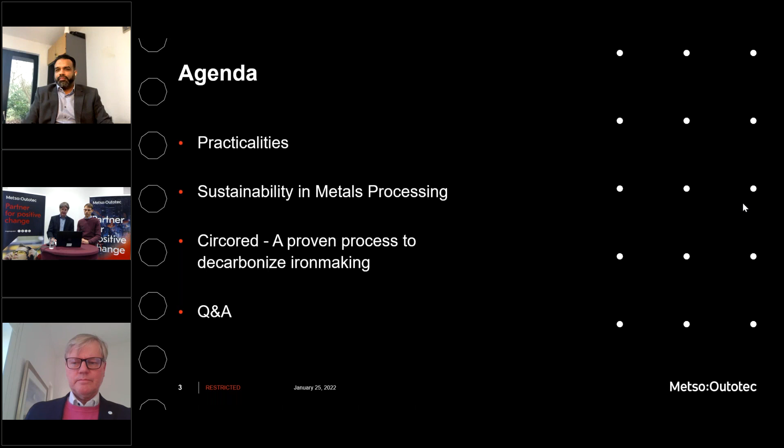Our agenda for the coming hour is as follows. After some practicalities, we will shortly introduce the strong focus on sustainability in Metso Outotec's metals processing technologies. The main part of this webinar will be the presentation about Circored as a process for ironmaking, which has already proven its functionality. After the presentation, we will have a Q&A session to discuss your questions and comments.

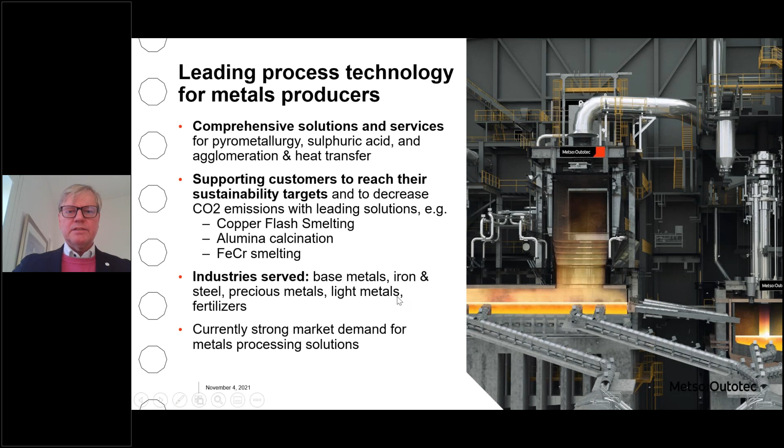The industries we serve are base metals, iron and steel, precious metals, light metals, and fertilizer. And currently, as I guess all of you are aware, there is a strong market demand for metals processing solutions, which we've also been able to show in our order intake during the last quarters, what we have been presenting.

Go to the next page. If we go more into what references we have available, in iron ore agglomeration, we have over 400 sinter plants and 140 pellet plants in traveling grate and grate kiln technology supplied, including the world's biggest ones. So if you really have need for a big pellet plant, the biggest in the world, come to us. Light metals, we have over 70 alumina calcination and tube digestion plants delivered. And then also in smelting, we are the industry leader.

We operate the world's largest copper, nickel, and ferrochrome operations, and we are also widely used in various secondary smelters. Over 60% of global pyrometallurgical copper and nickel are produced with our technologies, and around 60% of global ferrochrome is produced with this technology that we have available. We have also delivered 100 anode casting shops.

If we go into the right-hand side of the presentation, acid plants: we've delivered over 650 acid plants to date, with high efficiency gas cleaning solutions. We have the largest metallurgical acid plant delivered to date, 4,500 tons per day, and also the largest sulfur burning plant to date, 5,000 tons per day.

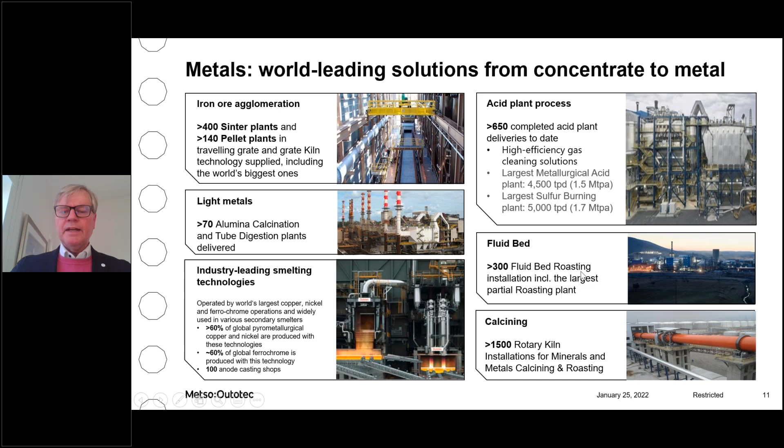And on the fluid bed side, we've delivered over 300 fluid bed roasting installations, again including the largest partial roasting plant in the world. And in calcining, we've delivered over 1,500 plants over time.

If we then look at major metals processing orders we've published since the merger: we've gotten an order for a zinc plant expansion of 150 million euros in Norway quite lately. We've also gotten a 90 million order for a nickel smelter modernization in Russia. And obviously the biggest order ever for the company, a 360 million euro order for a copper smelter to Freeport Manyar in Indonesia, and 6 iron ore pelletizing plants as well as 2 alumina processing plants.

To specifically see where they are situated, we talk about China and India, which I consider the 2 most competitive areas in the world to deliver plants, and that we've been able to achieve orders in this area means we are also very competitive. We don't only have the leading technology, but we can deliver it in a competitive way.

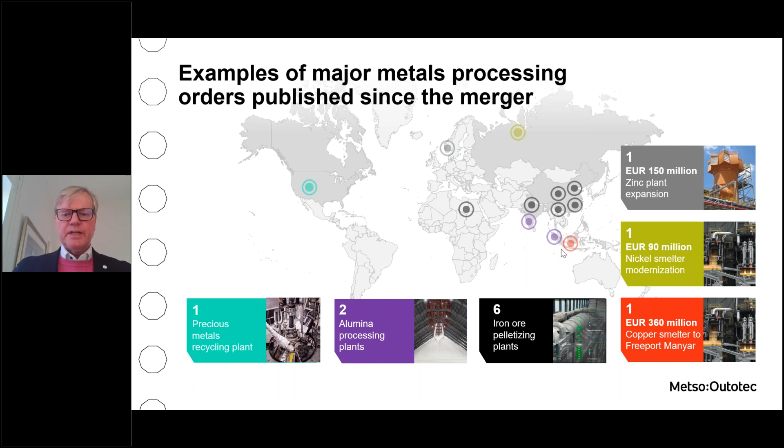On top of that, we have the precious metals recycling plant, which really shows we are also delivering state-of-the-art in the newest solutions, which is recycling plants.

If we look at technology development, we see today that global megatrends drive development: electrification, sustainability, digital transformation. Some of the things we also have to consider are delivering it in a modular design with digitalization, and as said earlier, product competitiveness and service, which is the basis for this leading edge offering we have today.

And then having differentiation through strong intellectual property and process development, because to really be a leader - if we look at our development, we have kind of 4 things that stand out. Either we have the highest yield, use the least water, use the least energy, use the least emission, or we have all 4 of these in the same product or process we are offering.

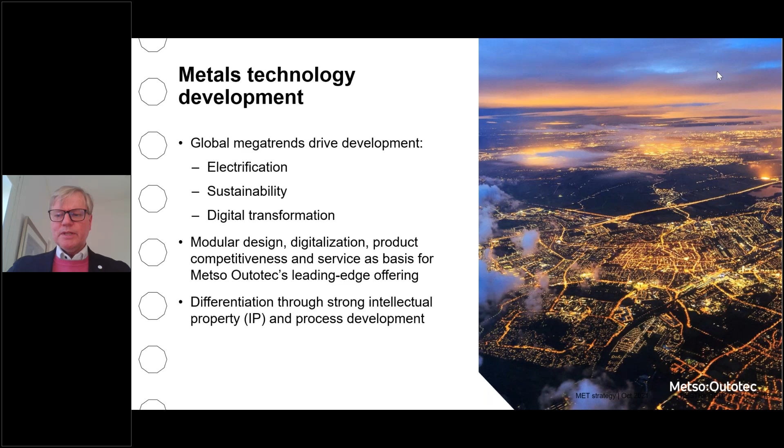If we look at the development we have going, carbon-free production is very high on the agenda at the moment, and that's something you notice in the news. If we look at carbon-free steel, you'll hear more about that going forward, but also carbon-free base and light metals, next generation pellet plants, as well as gas cleaning solutions - just to name a few of the areas where we are spending money to develop products for your use going forward.

As you can see here on the right hand side, we are saving over 7 million tons of CO2 emissions for our clients annually. And 100% of our R&D spend includes sustainability targets, because as you are aware, sustainability is something which is here to stay and will continue, and we want to be a leader in this.

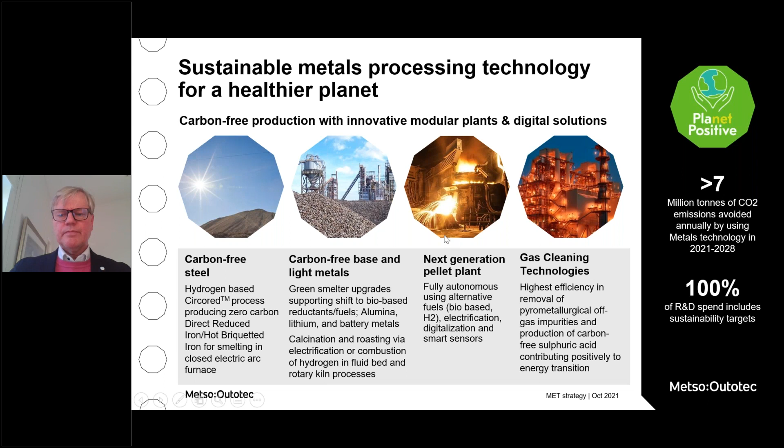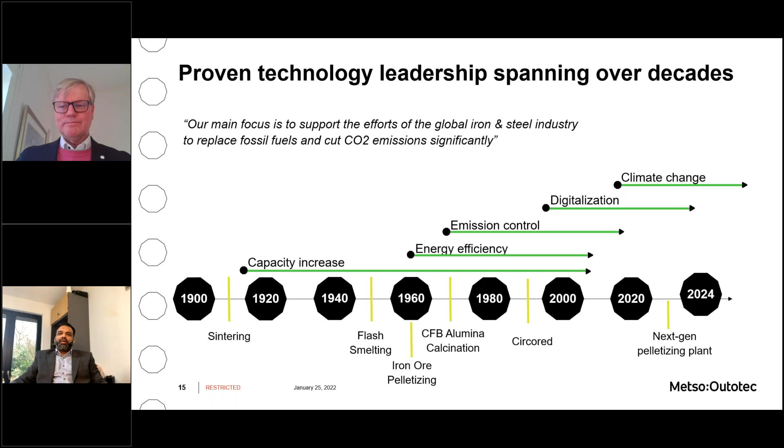Thank you very much, Jari, for having this detailed overview of our metals business. I will now go deeper into our ferrous and heat transfer business, and then hand over to Dr. Sebastian Lang for our webinar, basically for the Circored process.

So if you look, we as Metso Outotec have always been a technology company with all our predecessors. If you look at the history, we tried to develop new groundbreaking processes, but then also these processes became industry state-of-the-art products or technology. If you look in the history, we have here some examples shown. This is also to make you a little bit familiar that we are developing new processes, and you are with us along the way.

For example, we developed sintering around 1910, then we came with the flash smelter for copper and nickel concentrate in the 1940s, then with iron ore pelletizing in the 1960s, and then with the circulating fluidized bed process for alumina calcination in the 1970s.

We already developed the Circored direct reduction process for iron ore fines two decades ago, at the end of the last millennium. But at that time, it was not the right time to introduce this to the market. The world was not ready for decarbonization, but now it is the right time, and we are now introducing this technology to our customers. We did not only develop these new processes, we kept them over the decades at the status of best available technology, always upgrading them through continuous development, responding to the challenges of industry and society in each respective period.

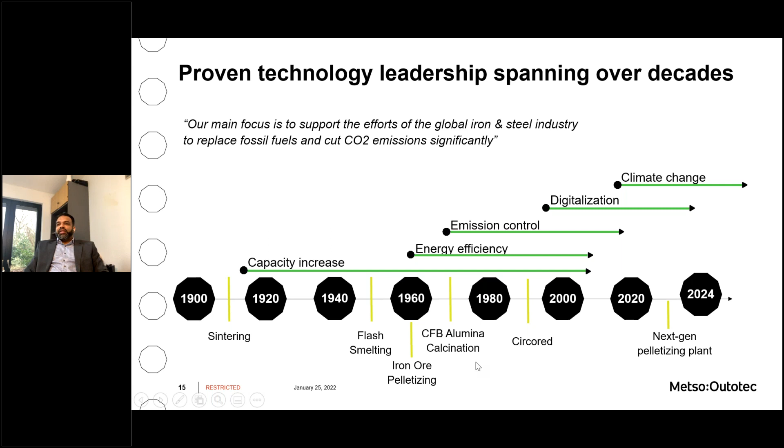In the beginning, the main focus was to increase capacity. Then in the 60s, to look more for energy efficiency. Later, reduction of emissions, for example dust or SO2. And in the last decade, we strove for digitalization. Today, I think we all agree the biggest challenge for our planet is climate change, and we need to reduce the CO2 footprint drastically. The steel industry is a big part of this, and we can contribute significantly.

To summarize, our clear focus going forward is on electrification, sustainability, and digitalization to drive the industry. Decarbonizing the industry is our joint target. Metso Outotec's metals business has a strong focus on carbon-free production. You have already seen our solution, and now as metals, we stand for a healthier planet.

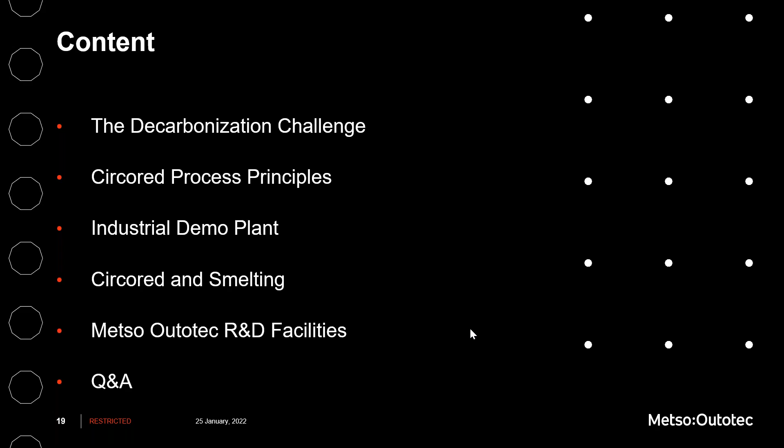With the pandemic still catching everyone's attention, my impression is we have an elephant in the room. The realization of how big the whole climate change issue is has started, and more and more countries, but also companies, have set ambitious carbon neutrality targets, latest by 2050. The global steel industry contributes a significant 8% to overall carbon dioxide emissions, which is no wonder, as the basic blast furnace route dominates the market share and emits almost 2 tons of CO2 per ton of steel, with coke ovens, sinter and pellet plants all based on fossil fuels.

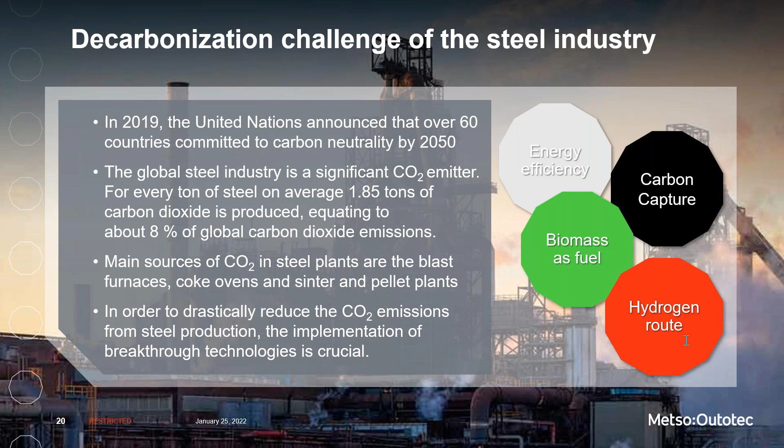To face the decarbonization challenge, innovation is needed and breakthrough technologies must be implemented. With Circored, we have such a technology at hand.

Circored is a 100% hydrogen-based direct reduction process for fine ore, omitting the necessity for agglomeration. Any hydrogen source can be used for the process, which is colorblind in that sense, but obviously green steel comes from green hydrogen. The product, DRI or HBI, does not contain any carbon. Nevertheless, it can be used in EAFs for steel making, which was successfully shown in industrial trials in the past. The technical feasibility of the process has been proven in an industrial scale demo plant in Trinidad at the beginning of this millennium.

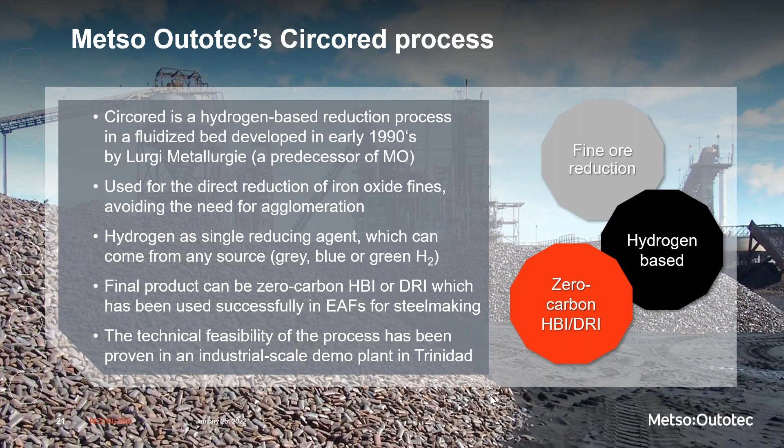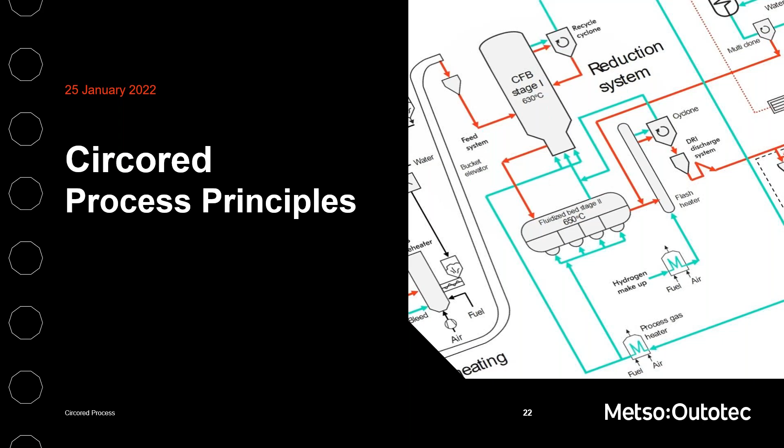Let's have a look at the process principles, its development history, and why fluid bed technology has such a nice fit to iron ore reduction based on hydrogen.

From a historical perspective, hydrogen was an enabler for direct reduction in fluid bed reactors. As early as the 70s, direct reduction in the fluid bed was introduced, but it suffered from problems with particle sticking, material buildup, and frequent shutdowns caused by the high temperatures needed for reduction under carbon monoxide.

Own research in the 90s revealed a healing effect when running the reduction on hydrogen, as the temperature could be decreased to avoid sticking. This was the starting point for the Circored process development. On the next slide, I would like to introduce some fluid bed fundamentals.

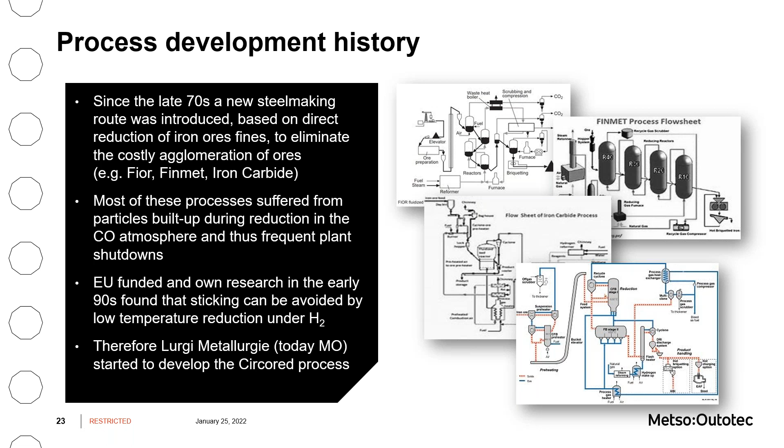The proper particle size and size distribution is paramount for fluid bed operation, as fluidization depends on drag and gravitational forces, which are particle size dependent. The Circored process works in principle with very fine material from 10 micron up to a particle size of 8 millimeters.

To achieve the optimal metallurgical outcome, the process involves, if needed, steps to narrow down the particle size distribution. Ultrafine material can be microgranulated, and too coarse material can be crushed by mechanical or thermally induced forces before being fed to the metallurgical core plant.

The core plant consists of a circulating fluid bed reactor, CFB, and a stationary bubbling bed reactor, FB, to account for the special nature of the iron ore reduction. The reactor types are further explained on the next slide.

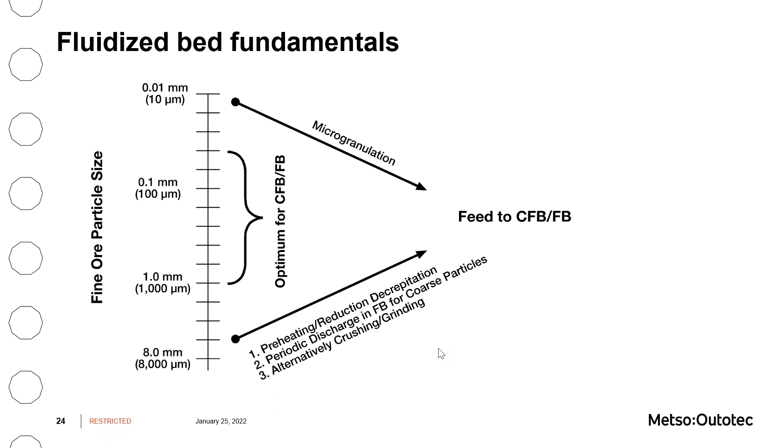Here we can distinguish between three reactor systems, which are all part of the Circored process. The bubbling or stationary fluid bed is characterized by low gas velocity and a sharp interface, which forms an apparent bed surface. The carryover is limited. Slip velocity and throughput are low, which means the reactor system is well suited for cases where prolonged residence time is required.

In contrast, a circulating fluid bed reactor has a high gas velocity with high solid entrainment and recycling rate. Intensive mixing and excellent heat and mass transfer make it an optimal reactor for fast reactions with short residence time requirements.

The transport or flash reactor has high solid entrainment caused by very high gas velocities. It does best what its name suggests: pneumatically transporting material. As it provides still decent heat transfer rates, we use it as a flash heater in the process. The next slide shows nicely why these reactor types are ideally suited for iron ore reduction under hydrogen.

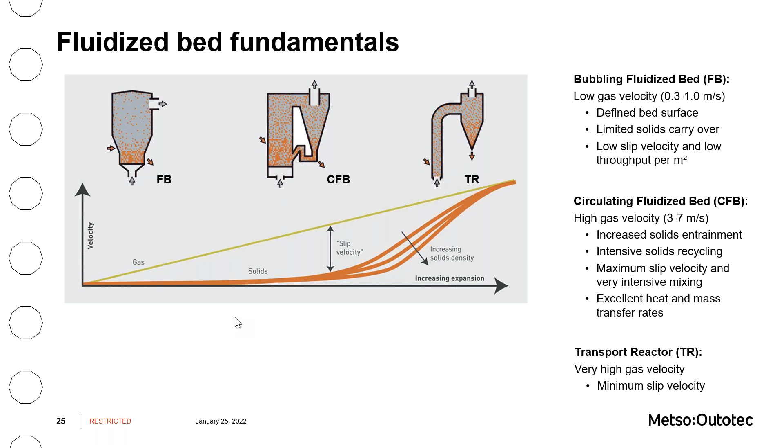The two-stage reactor setup of first a CFB and a downstream FB is adapted to this reaction characteristic and optimized in regard to residence time requirements, with minimal reactor sizes and hence minimized capex as a result.

As mentioned earlier, hydrogen is an enabler for the fine ore reduction, lowering reaction temperatures and omitting sticking. Operating at elevated pressure of around 4 bars reduces the gas volume substantially. This helps decrease piping and equipment size and therefore investment cost. It has no effect on the thermodynamic equilibrium of the reaction. Nevertheless, it helps remove the product water from the recycled hydrogen gas via condensation.

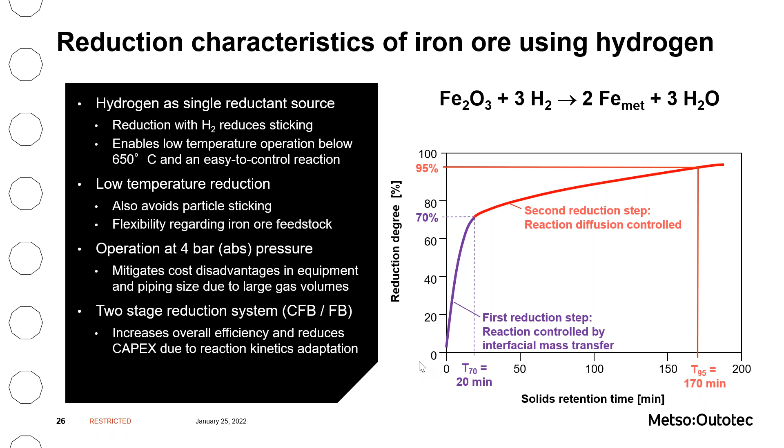Thermodynamically, the reduction reaction is highly endothermic, which means we have to provide heat to drive the reaction. This is achieved via the sensible heat of the gaseous and solid reactants. Therefore, the fine ore material is fed into an atmospheric preheating stage. In case of magnetite as feed material, the material also gets oxidized to convert the dense mineral structure to a better reducible state.

The hot ore is then fed at elevated temperature into the metallurgical core plant, consisting of CFB and FB reactors. To create a closed loop system for the hydrogen, a process gas treatment sits aside, removing product water and dust. The metallized DRI gets downstream discharged to a briquetting section to produce HBI ready for shipping or smelter charging.

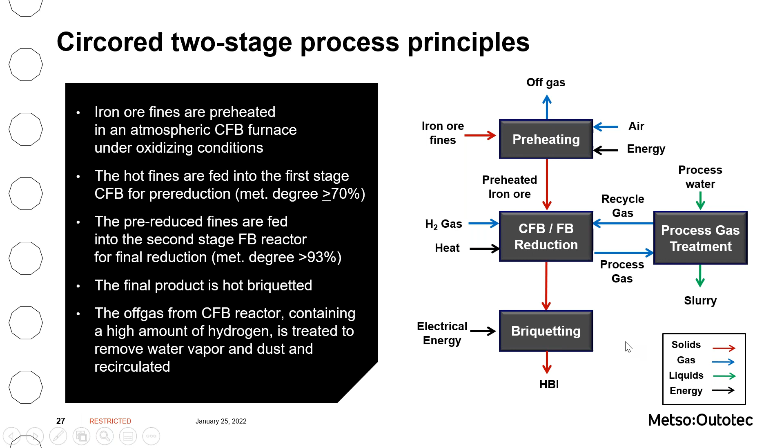Looking at the overall flow sheet, we start out with the metallurgical core of the plant, the two reactor stages. The CFB is fed with hot iron ore and receives fresh hydrogen and dust-laden gas from the FB reactor.

There we have excellent mixing, which drives the reaction within 10 to 40 minutes at around 630 degrees, always depending on the nature of the ore, to the desired reduction degree.

For final metallization, the solid material is discharged to the FB reactor, giving it the required residence time and a high thermodynamic driving force via the fresh and hot hydrogen to reach metallization degrees above 93%. The overall reactor setup is mimicking a countercurrent process to harvest its thermodynamic benefits.

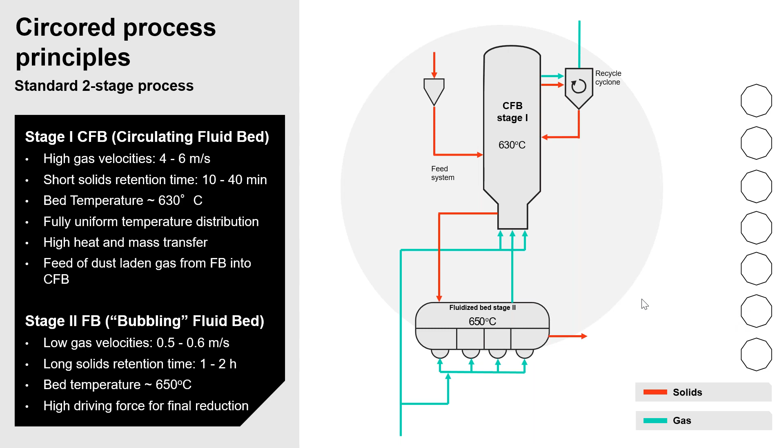The dusty material is then blended with the product stream to minimize production losses. The remaining dust and product water get removed by a scrubber system. The hydrogen gas gets then recycled back into the process. The hydrogen bleed is used as fuel for heating purposes.

The highly metallized DRI gets discharged from the second stage reactor and superheated by the flash heater to appropriate temperatures for hot briquetting to produce HBI, or alternatively, the material can be directly charged to an EAF for hot beneficiation.

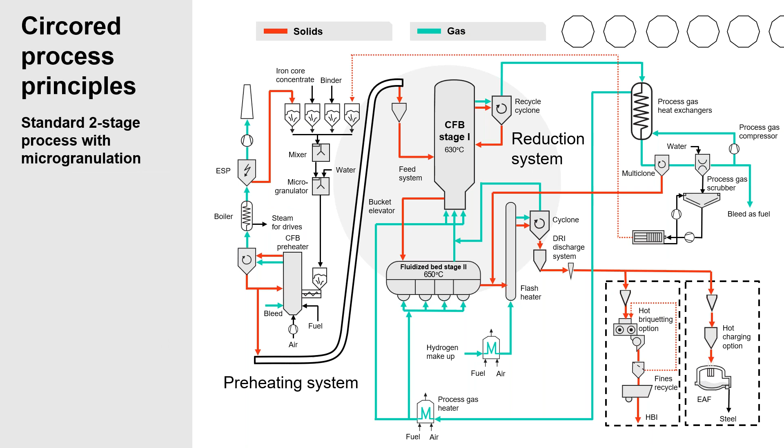We had mentioned the option for microgranulation, which is shown on the next slide. In this case, ultra or pellet fine concentrate is fed together with a binder to a mixer and subsequently microgranulated under some water addition. This process variant brings the advantage to recycle the dusty material reclaimed by the scrubber system.

The green granules get then fed into the preheater for hardening. The downstream process route remains basically the same.

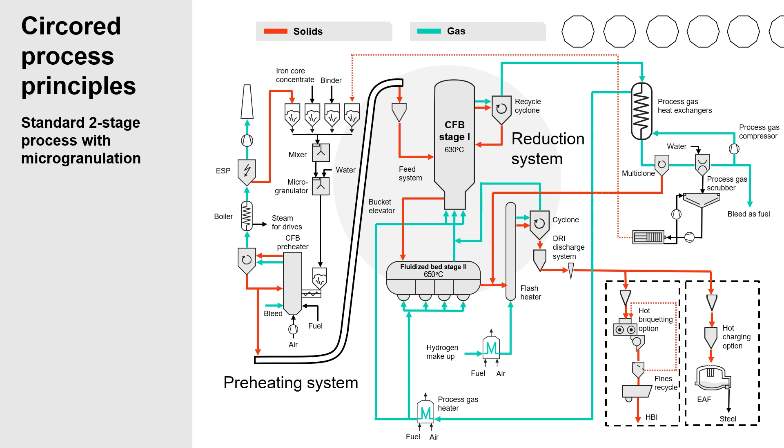Let's summarize the process here and name some consumption figures. To produce a ton of HBI, it needs 630 normal cubic meters of hydrogen, 1.5 tons of ore, 750 kilowatt hours heat, and about 130 kilowatt hours of electricity.

All typical ore types can be used. For merchant HBI, the iron content needs to be above 66%. The preferred grain size should be in the range of 100 micron up to 2 millimeters. If substantially finer, microgranulation can be applied. For coarser material, size reduction is needed.

Hydrogen is the only reductant in the process, regardless of its origin. For preheating, any fuel can be used. Future process variants will be fully electrified. Nitrogen for purging and inertization is a consumable and needs to be considered in the balance of plant.

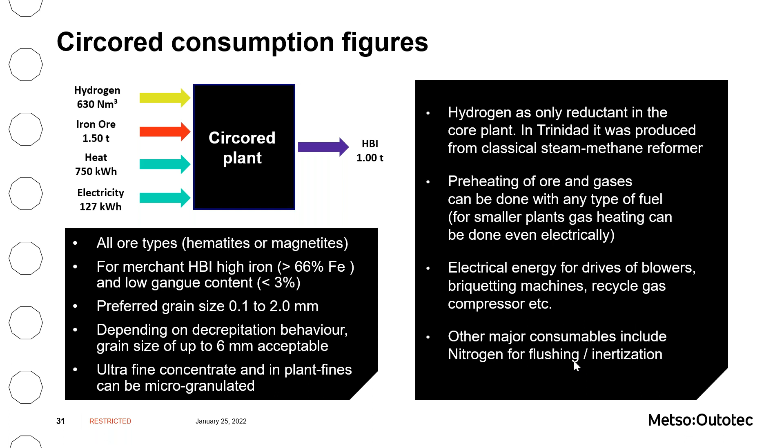Now, benchmarking Circored against other steel production routes is certainly interesting for you. So let's have a look.

To have a fair comparison of different steelmaking routes, we chose the battery limits to cover the whole value chain from mine to crude steel. All unit operations are included in terms of energy, cost, and emissions.

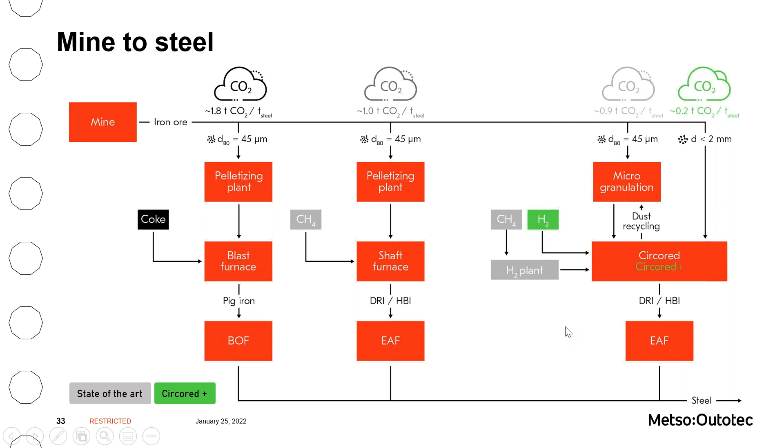Worthwhile to highlight is the price for carbon taxation of $40 per ton, the fine ore price of $120 per ton, and the pellet premium price of also $40 per ton. These figures are rather conservative, I would say. The predicted future hydrogen price of $1.5 per kilogram is based on the predicted electricity price of 2.5 cents per kilowatt hour. These last future predictions are only taken into account for the Circored Plus process variant.

First, let's have a look at the carbon dioxide emissions. The blast furnace value chain is here emitting the most, with 1.8 or actually 2.5 tons per ton of crude steel when neglecting the credits from electricity production, which will probably be the case once the grid is mainly fed with renewable electricity in future. The blast furnace is followed by the shaft furnace route with slightly above 1 ton per ton of crude steel.

Even based on steam methane reforming, Circored can lower the carbon dioxide footprint to 0.9 tons per ton of crude steel, about half of the blast furnace route today. Circored Plus with electrified heating gets basically down to zero. The 200 kilograms per ton of crude steel still emitted come from the carbon addition to the EAF smelter operation.

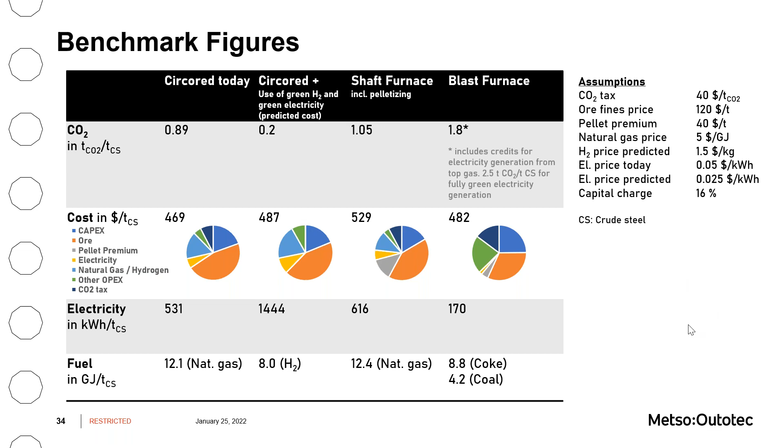After this rather theoretical exercise, let's have a practical look into the field and revisit the industrial demo plant operated in Trinidad around the year 2000.

This plant was designed for hematite ore from the Carajás deposit in Brazil. The particle size between 100 micron and 2 millimeter was ideally suited and could directly be fed to the process. The product, zero carbon HBI, was shipped to the US market for smelting in EAFs. The design capacity was 500,000 tons per year.

Today, we see an economical size for a single line at 1.25 million tons per year. Several lines can be built, sharing a common balance of plant like hydrogen production or air separation facilities.

Building and operating a first of its kind plant has always challenges and comes with learnings. At the end, it were not the teething problems which led to the final shutdown of the plant in 2005, but rather the market and political circumstances in Trinidad during that time. The experience and learnings that we took from this plant are invaluable and the basis for today's design.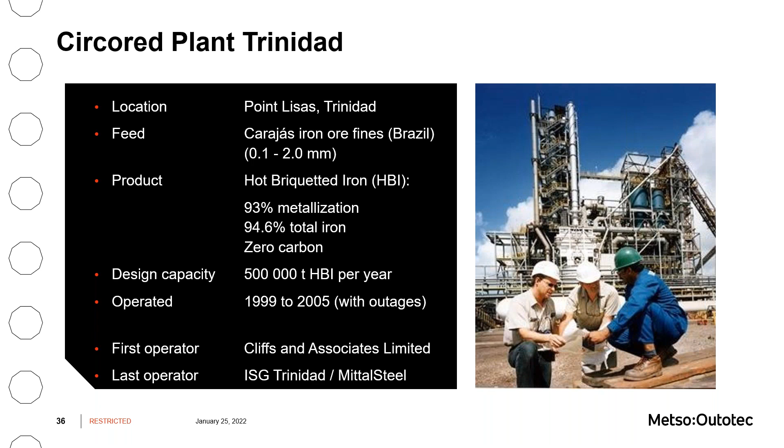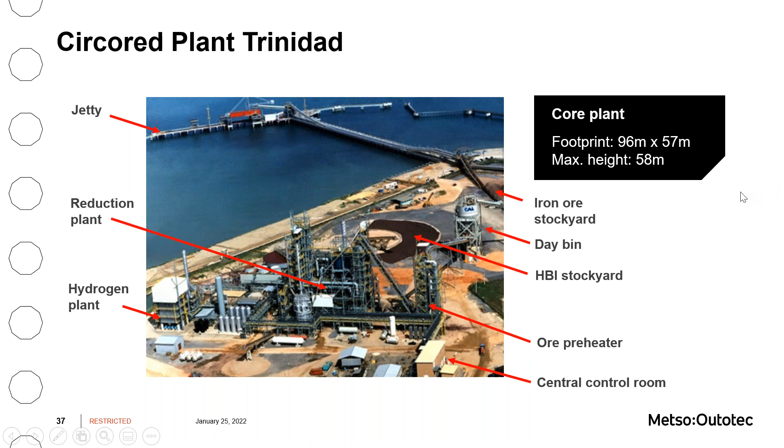If you ask me, this plant was erected 20 years too early. Today, the market drivers have dramatically changed, and direct reduction based on hydrogen makes more sense than ever before as a solution to the decarbonization challenge of the steel industry.

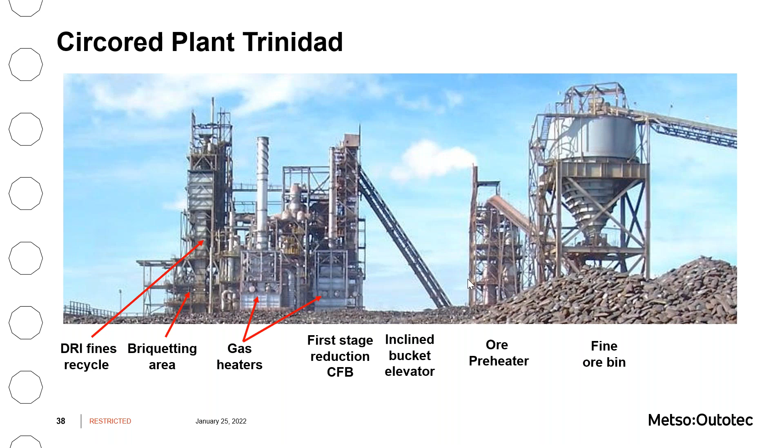Talking about industry challenges, another challenge is connected to the declining ore grades, which brings us to the concept of hot beneficiation. DR grade ores are scarce, and the market will have to find a solution to the question of how to process BF grade ores. Single stage Circored in conjunction with a smelter provides an approach there.

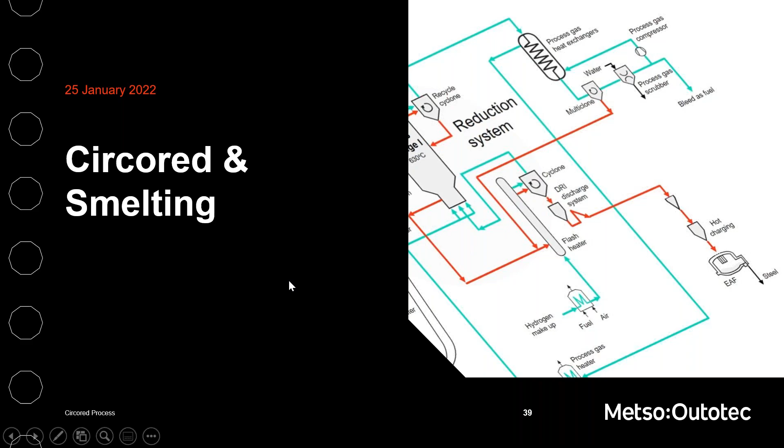Circored fits into a bunch of different scenarios. For DR grade ores, the standard two-stage Circored process is well suited, as we have discussed before. Then direct feeding to EAFs, or as additional burden to blast furnaces, is applied, helping them reduce their emission footprint by some percentage points. This will be interesting during a transition period.

For low BF grade ores, a single stage Circored process in conjunction with a smelter is the proposed option. This comes with reduced complexity and a lower capex requirement on the Circored plant. The pre-reduction degree in the CFB can be adjusted to meet the requirement from the smelter. Around 80 to 85% is possible without too much jeopardizing the reactor size.

Following this hot beneficiation approach, the pig iron can be fed into an existing steel production route, which continues downstream with the basic oxygen furnace. From an investment perspective, this prevents assets from stranding and substitutes only the highly carbon dioxide intensive steps of sintering and coking, keeping the rest of the steel mill's production chain alive. We can have a look at this simplified flow sheet on the next slide.

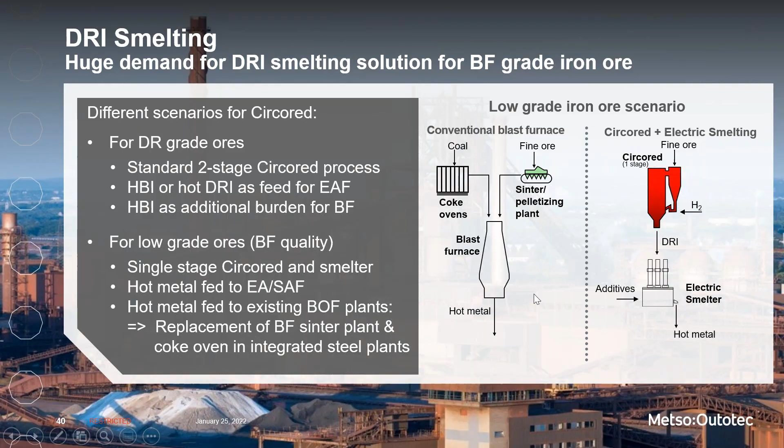As mentioned, here we are operating the metallurgical core plant only with a single stage reactor setup for low-grade iron ores. The reactor design is adjusted to reach the requirements arising from the smelter operation. The product is pig iron, and the impurities in this hot beneficiation concept get separated in the smelter via the slag.

The slag can be a potential side product for the cement industry. The flow sheet is simplified as some of the hydrogen gas heaters, briquetting machines, and flash heater are not required anymore.

With this concept explained, I'm already coming towards the end of my presentation. But I do not want to miss the chance to highlight shortly our R&D and pilot plant capabilities in Frankfurt.

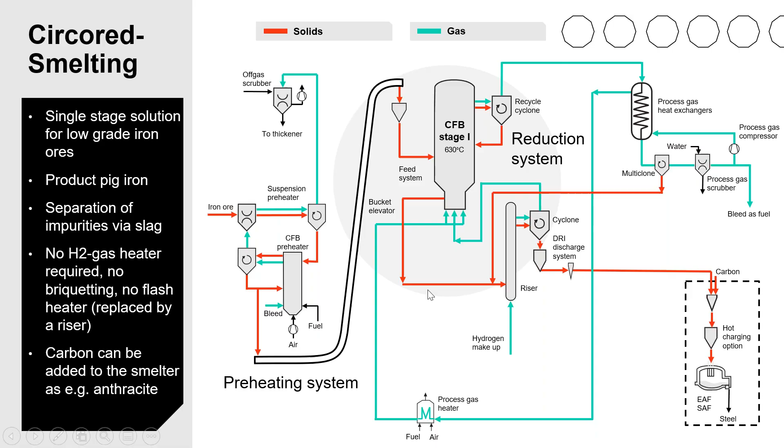Our typical approach to check the applicability of certain customer materials to our Circored technology is shown on the next slide. Besides standard material characterization via XRD, XRF, wet chemical iron analysis, and particle size analysis, we start testing the material in a 50 millimeter small scale batch reactor to get a first idea about the reducibility of the material under certain process conditions.

We then increase the size of the test reactor to 80 millimeter, running the process continuously and under pressurized conditions. From these tests, we can already derive first design information for equipment and plant sizing.

Test work in a 200 millimeter reactor setup is complementing the scale-up process for the reactor design. This gives also the possibility to produce enough product to pilot test unit operations like hot briquetting or smelting downstream. The overall scale-up process is accompanied by the application of simulation models to transfer the gathered experimental information into an optimal industrial plant design.

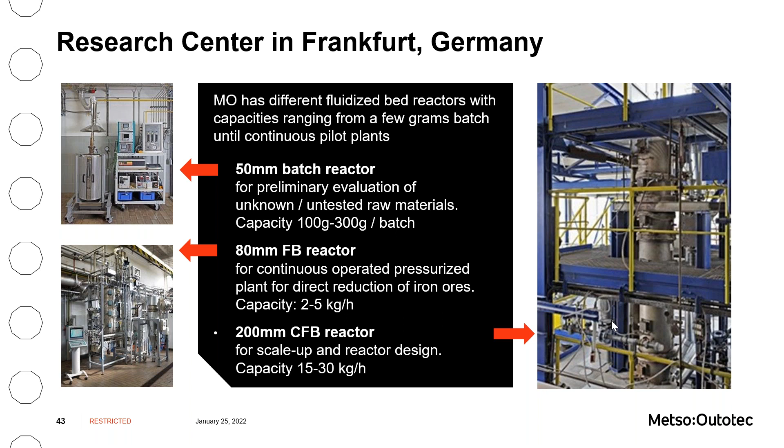Produced HBI or DRI can directly be used as feed materials in EAFs for green steel making, as soon as green hydrogen is provided. Even on classical steam reforming, Circored saves 50% of the blast furnace route emissions right away. Single-stage Circored allows to process low-grade ores in a hot beneficiation concept with a downstream smelter. With all this, Circored is a possible step to carbon-free steel production in the future.

Thanks for staying tuned, and I'm looking forward to discussing the topic with you.